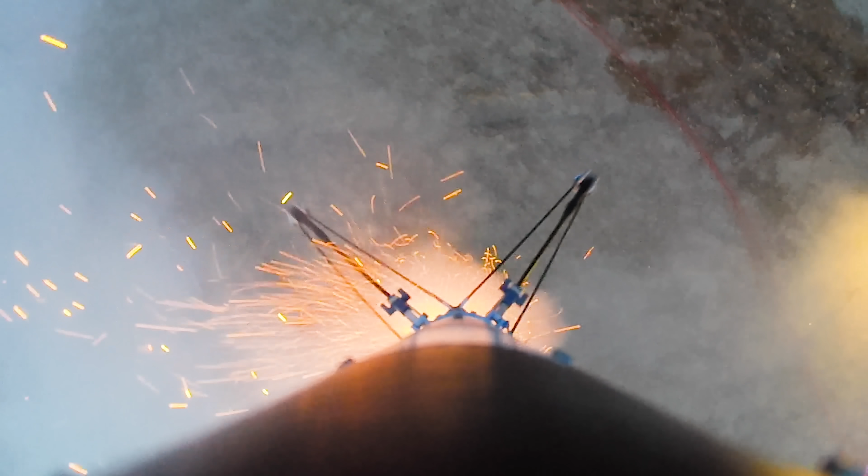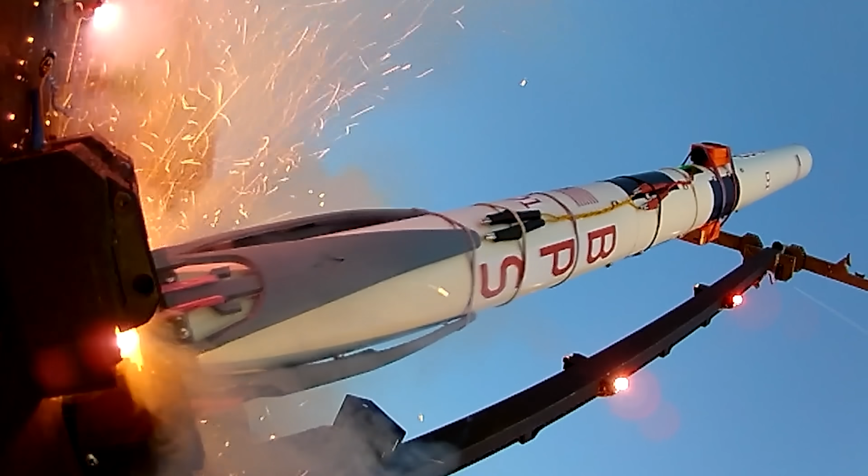There's something I'm a little afraid of. For the last 9 years, I've been building rockets, and most of them don't fly like your typical model rocket. That's not the secret—I made a whole YouTube channel out of it. The thing I'm afraid of is a type of control, a technique used to keep a rocket stable. A lot of the rockets I fly don't use fins.

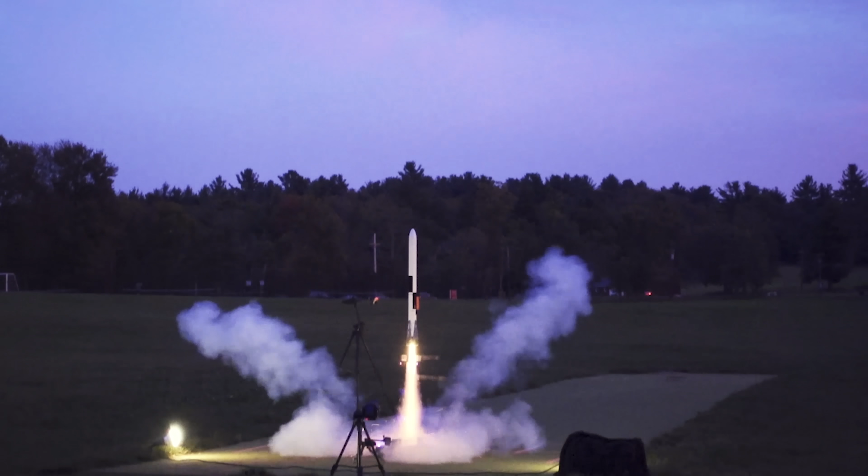They keep themselves on course using little servos to steer the rocket motor at the bottom. You can think of this like balancing a stick on your finger. When you tilt the rocket motor to the side, there's a little trigonometry you can use to figure out how powerful that resulting side force will be. That is not what I'm afraid of—I actually really like trigonometry. Let's just get to the juicy part.

The thing I am afraid of is aerodynamic control, using movable fins to steer the rocket. I'm not afraid of it because I haven't tried it—I'm afraid of it because over the last few years, every time I've tried, it hasn't worked.

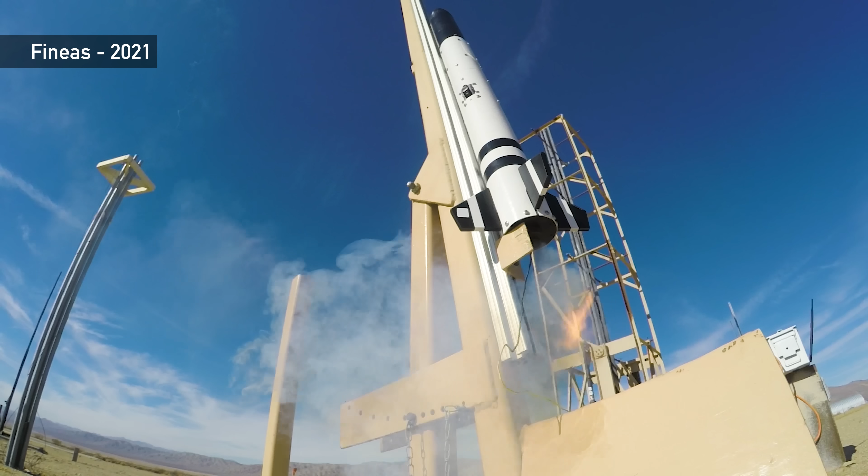The most serious attempt at aero control was on the project I did with Mark Rober to drop an egg on a guided re-entry vehicle from 100,000 feet. But we couldn't get beyond subscale drop tests. The vehicle would almost instantly lose control.

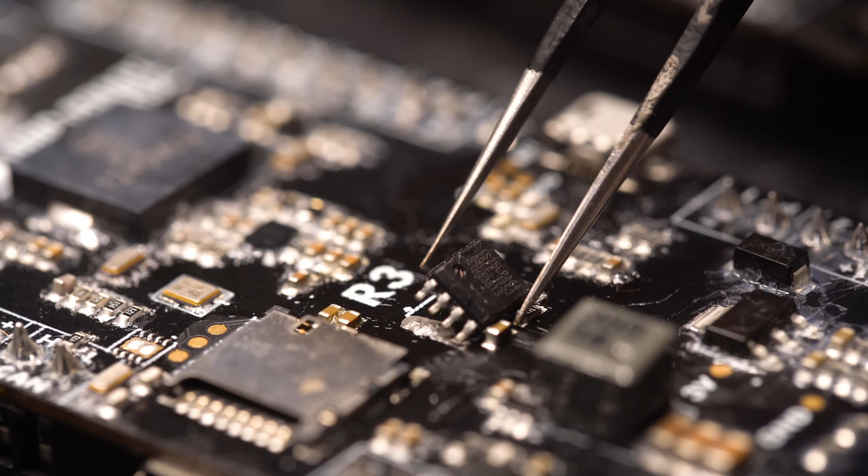So what makes this hard? Why can't you just tilt the fins in the right direction and steer it where you want to go? The answer involves a lot of math, and the good news is we're not doing any of that math today—that's the topic for the next video. Today is all the cool stuff. In this video, I'm going to show you the first time I have ever gotten supersonic aerodynamic control to work.

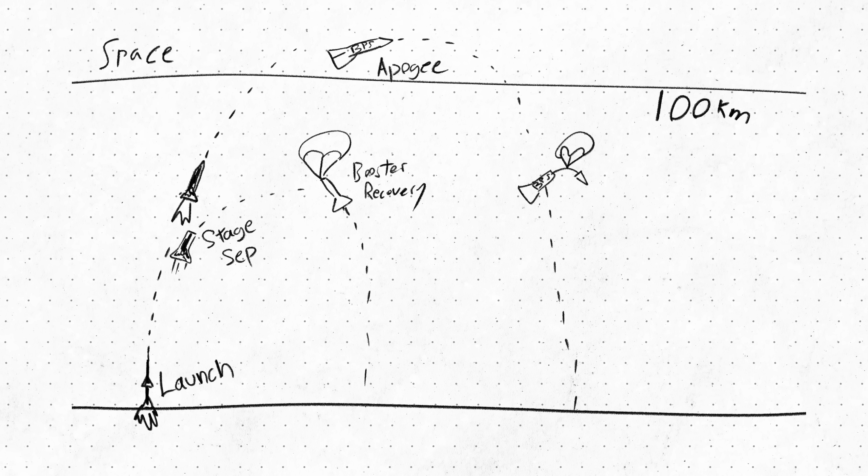Before we begin, I want to answer why I want aerodynamic control. I'm on a long journey toward building a space shot, a rocket that goes over 100 kilometers. The burn time on the rocket motors will be relatively short, which means if we use thrust vector control, we'll have large portions of uncontrollable flight.

So instead of thrust vector control, we'll use traditional, flat, non-moving fins to keep the rocket on course. This is called passive stability. You point the rocket where you want it to go, launch with little or no wind, and as long as it gets up to speed quickly, the rocket will fly relatively straight.

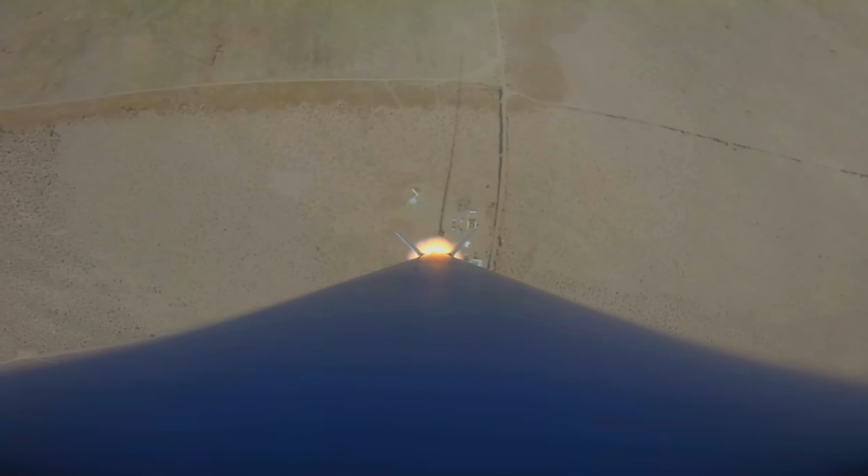One project goal for the space shot is capturing good footage on the way up and while in space. Here's the thing about fins on a rocket: misalign them a little, you spin. Any asymmetries on the body, you spin. Launch on a day that ends in Y, you spin. For this reason, I designed a camera spinner to counteract that rotation.

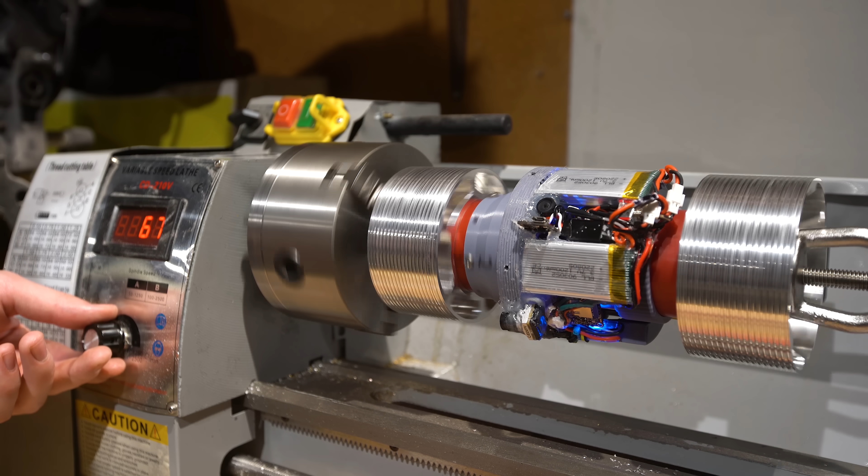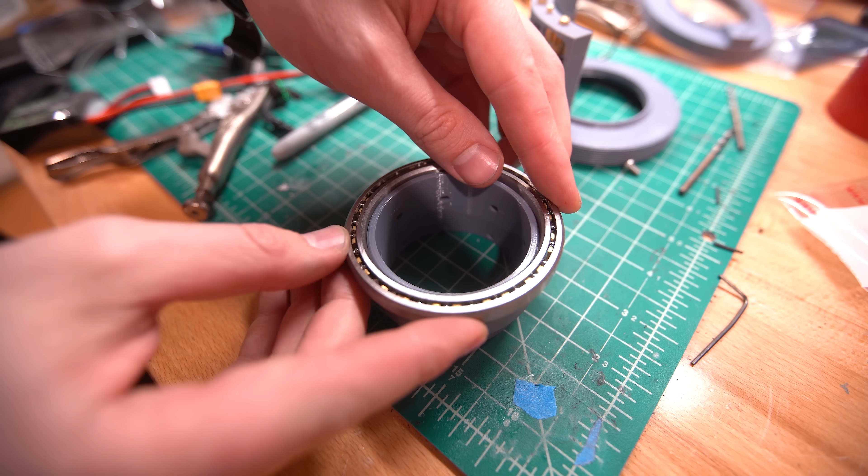The idea was to mount all onboard cameras on a large bearing, then spin them at the exact speed and in the opposite direction of the rocket. So while the rocket spins, your footage comes out stable. If we have this on the space shot, it can spin as much as it wants and we'll still get good footage.

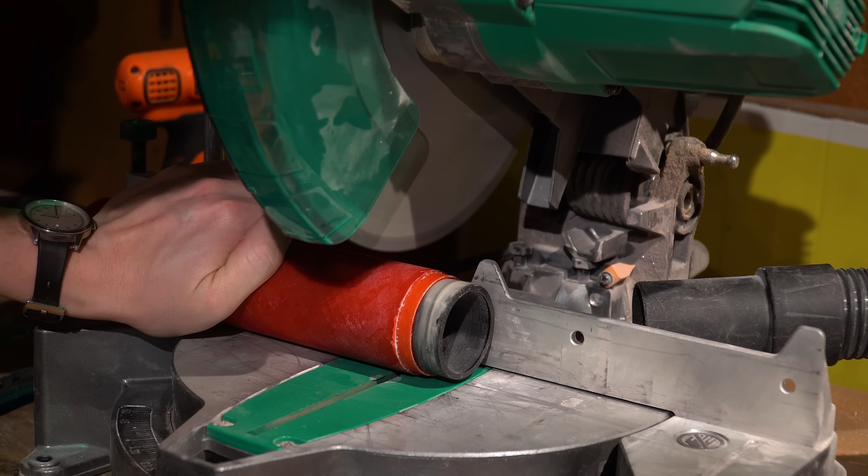There are two problems with this approach. Number one, it was stupidly heavy—you've got to transfer all those bending loads through a smaller center tube, and the attachment points on either side need to be very well aligned. Honestly, it was kind of a nightmare to build. Two, it's overcomplicated. At some point, why don't we just not let the rocket spin?

That is where aerodynamic control comes in. We want to control the roll axis. I want footage that looks like this, but smoother and without the spinning fins. I don't just want to control roll though.

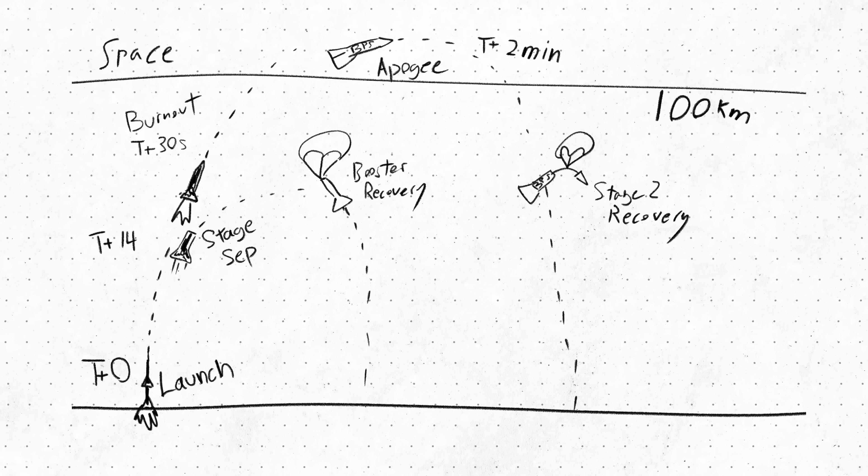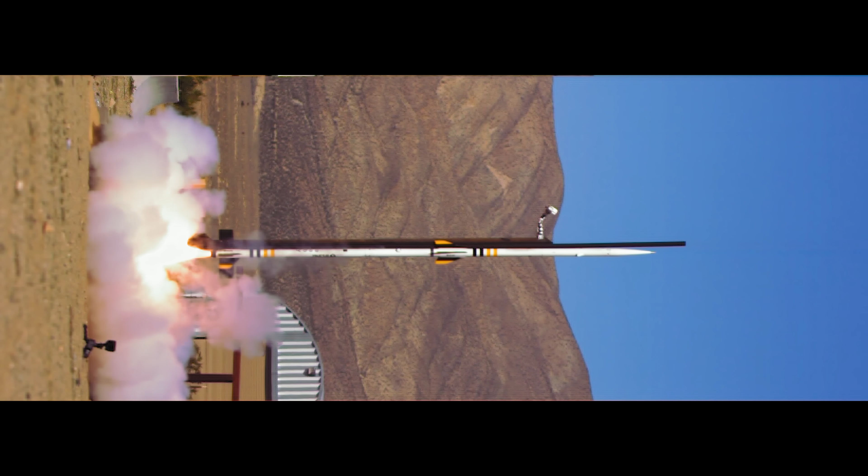The space shot architecture I've got right now is 2 stages, not 1. 2-stage high-altitude vehicles are notoriously bad for recovery dispersion. With no guidance, a 2-stage space shot rocket can easily land 10, 20, 30 miles away, which constrains where we can launch this thing pretty hard. Part of that dispersion is wind on the way down, but a lot of it is the second stage pitching over on the way up.

No matter how hard you try to point the vehicle upright, there are many contributing factors that will cause it to tip over slightly as it ascends. So what if we just keep nudging it back to upright with tiny control surfaces? In my mind, we've got two options—actually, there's a secret third option.

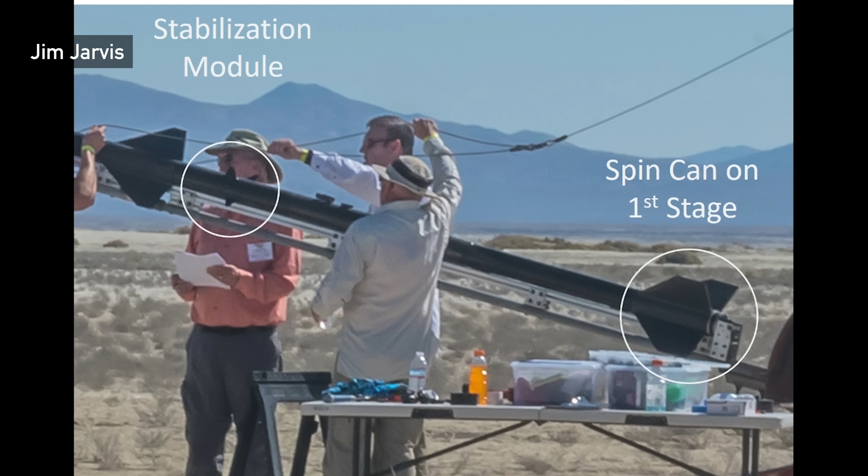Option one: we add canards on the front of the vehicle—little tiny movable fins. With 4 canards, we can move the rocket around in roll, pitch, and yaw. These are seen all over the place on missiles and rockets. Even in amateur rocketry, folks like Jim Jarvis have perfected systems like this. One thing you'll notice with Jim's flights is that the fins at the bottom of the rocket are spinning. Why is that?

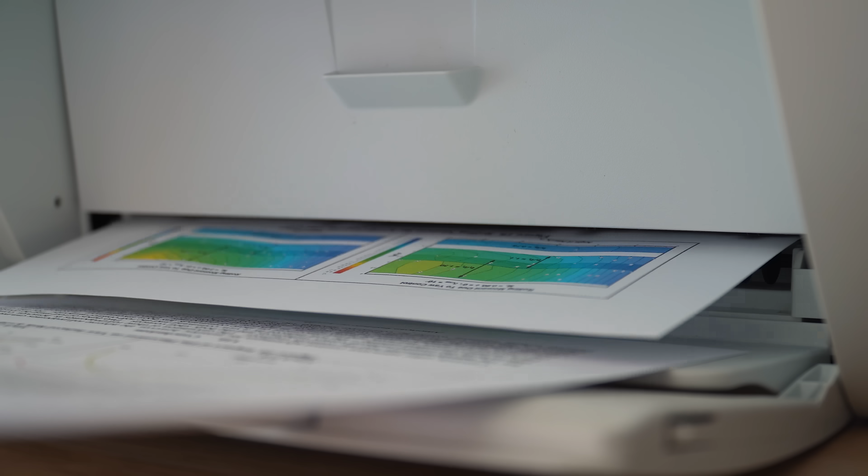The effect of tail fin parameters on the induced roll of a canard-controlled missile. No offense, not a very catchy title. Maybe toss a Mr. Beast face and call it '10 sexy tips to keep it going steady: how to prevent your missile from rolling.' Anyway, check this out.

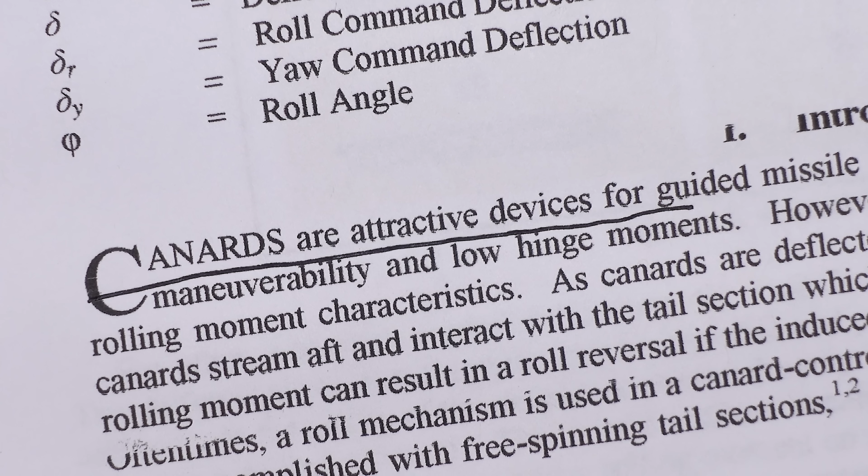Canards are attractive devices. I'm telling you, change the title. This is already clickbait.

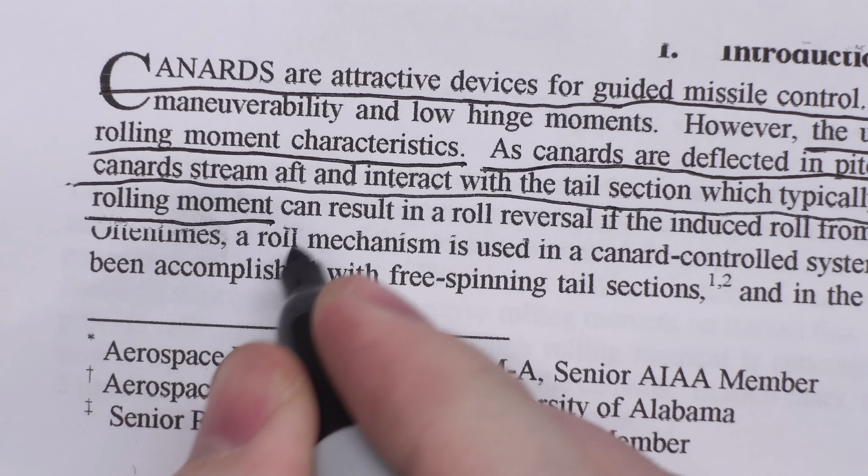The use of canards as control devices complicates the rolling moment characteristics. As canards are deflected in pitch, roll, and/or yaw, vortices emanating from the canards stream aft and interact with the tail section, which typically induces an adverse rolling moment. This adverse rolling moment can result in a roll reversal if the induced roll from the tail fins exceeds the direct canard roll control—i.e., the downstream effects from the canards can be more powerful than the canards themselves.

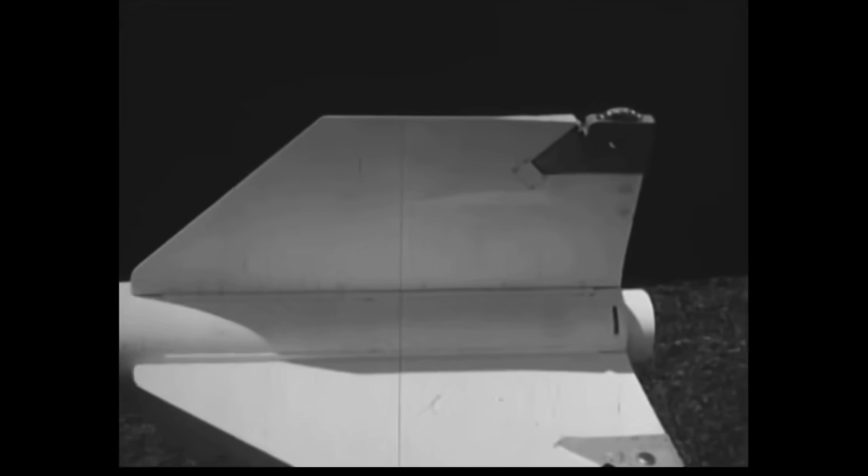Oftentimes, a roll mechanism is used in a canard control system to mitigate the adverse roll properties. This has been accomplished with free spinning tail sections, or in the case of the Sidewinder missile, with rollerons.

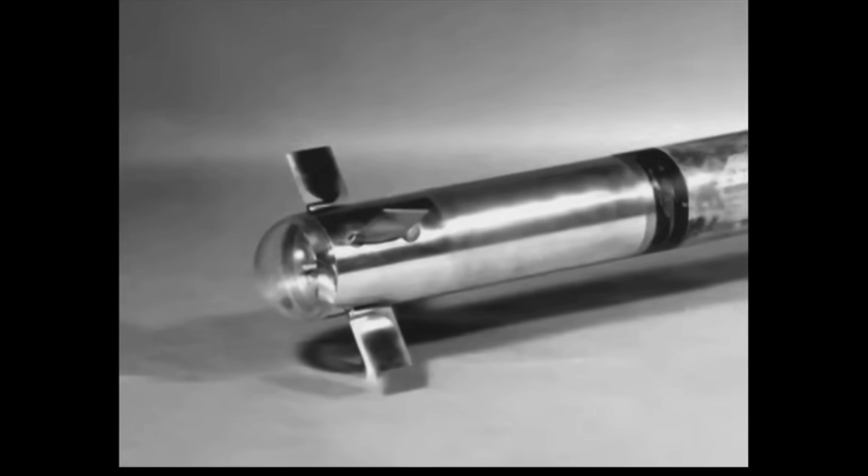The TLDR is that when you tilt a canard forward of the set of static fins, the vortices that shed off that canard fall back toward the aft fins and can sometimes, not always, generate enough of a low pressure zone to induce the exact opposite control input. It is an inherently chaotic and turbulent phenomenon, and for that reason, it is extremely hard to simulate.

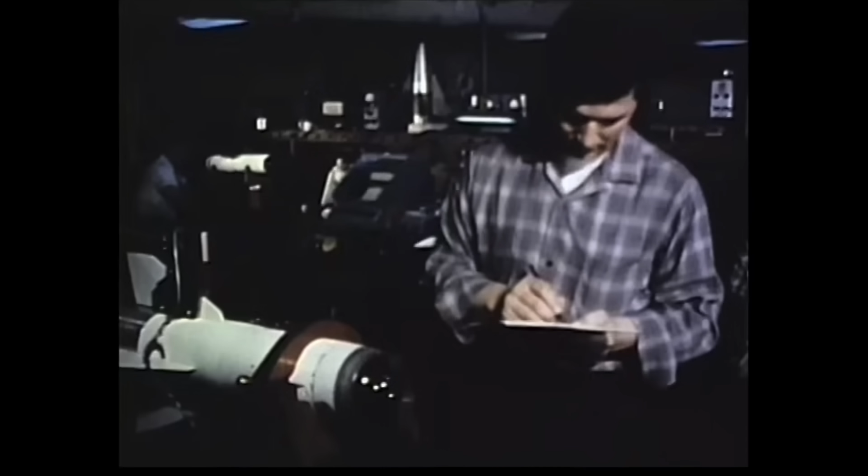Rollerons, by the way, are a very cool solution to this problem. In the 1950s, when the Sidewinder missile was being developed, the rollerons were added in part because we had no way to model the complex vortex shedding that comes off of the canard tips.

And now, we do have that capability. Defense contractors do have that capability, which is why newer versions of the Sidewinder do not feature rollerons, and basically all modern missiles don't have them either.

I do think it would be a fun project to fly some rollerons in the future, but I'm not interested in using them for the space shot. I'd like to actively control yaw, pitch, and roll, and we should search for a solution that does all three axes at once. With vortex shedding making canards, as the paper might put it, the less attractive option, another solution would be to rotate the aft fins themselves.

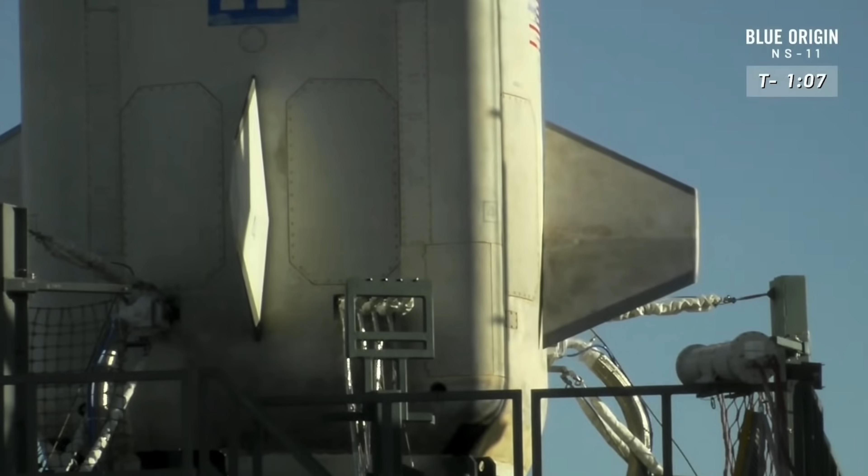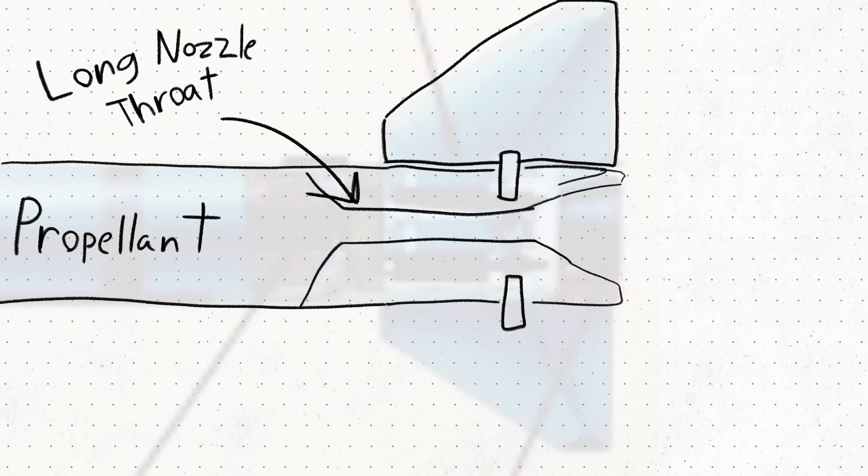This is another common approach with modern missiles and sounding rockets. Typically, engineers will design the fins such that they attach right near the throat of the rocket motor's nozzle. If you're careful about thermal management from the rocket motor, and efficient in your nozzle design, you can jam actuators inside this free volume and steer the rocket in yaw, pitch, and roll with one set of fins.

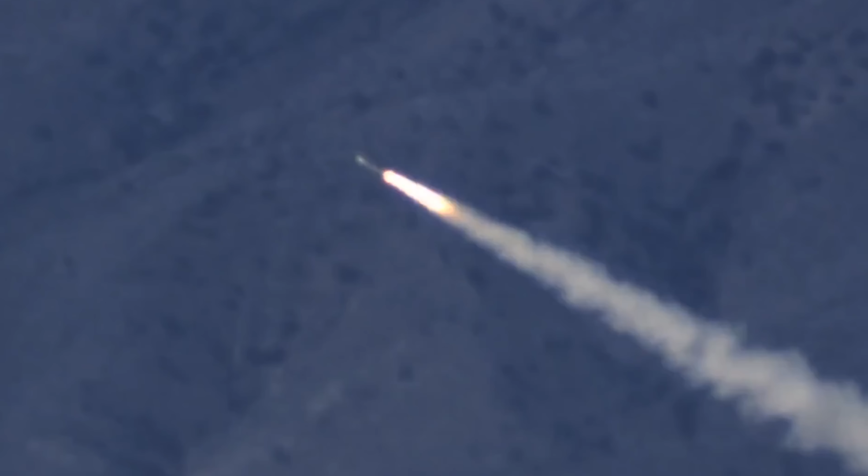This, of course, like anything, has pros and cons. Pro: you have lots of control authority. Once you're up at Mach 2, tilting the fin even 1/10 of a degree will generate enormous side forces. If you wanted to make a 90-degree turn, you could do so in a hurry, and that's why this approach is seen on a lot of missiles that need to swoop around pulling high G turns.

As for the cons, let me put it this way: I know I joke about being built different, but even in these jokes, I don't think I'm built different enough at both solid motor and actuator design to get this approach to work. And the thing is, it's overpowered for what we need anyway.

I'm looking to take a rocket that is 2 degrees off of vertical and make it 0. We need tiny, gentle corrections, not some hard-turning anti-aircraft machine. I just want to go up.

Let's recap. I want a set of control surfaces to very gently nudge the rocket back to upright if it tilts over on ascent. We're actively looking for a low control authority solution, and this rules out the rotating aft fins. Canards are the next obvious choice, but they suffer from the control reversal phenomenon that I do not have the analytical tools to design around.

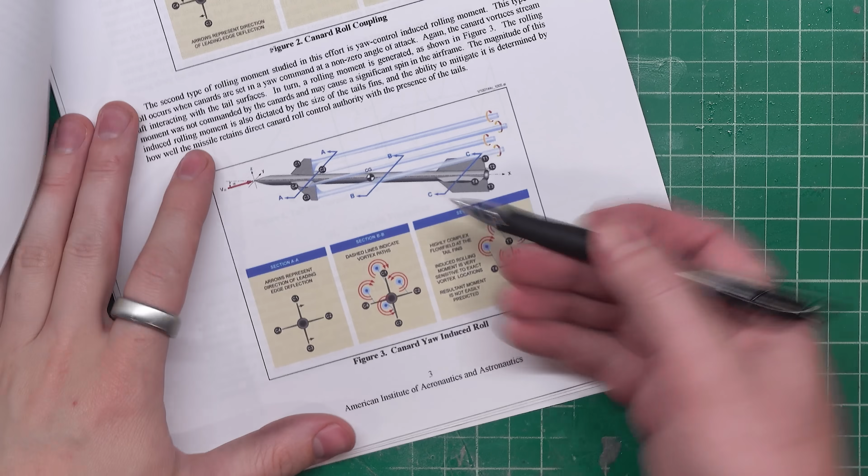And while the spin can fix the roll axis, I have concerns about how well it will work in pitch and yaw control. To be honest, there's always going to be 20 plus ways to solve a problem like this. Genuinely, if you were approaching this problem, I'm curious how you would solve it.

Do you think it's easier to make the fin spin? Would you design your own precision actuator to rotate the aft fins? Would you ditch the two-stage approach entirely and go for one enormous single-stage rocket to make the dispersion problem easier? All of these videos are just me trying, bit by bit, to figure out how to build this space shot.

And while the spin can with canards seems like a viable solution, I have another interesting idea that I would like to try.

What if we had all the benefits of canards with none of the vortex shedding issues? The way this works: embed the canard in the fin.

If we keep the static fins the same size, we can cut out a portion of the trailing edges, embed a servo inside the fin, and use that to gently nudge the rocket where we want it to go.

This approach also means we can tailor the size of the tab to meet the exact control authority we need, while sizing the overall fins to meet the passive stability needs of the rocket. TLDR, we only need small control authority, so we only need small control surfaces.

All of this is just theory though, and as we all know, theory will only take you so far. Let's build it. Using Onshape, let's take a look at the plan here.

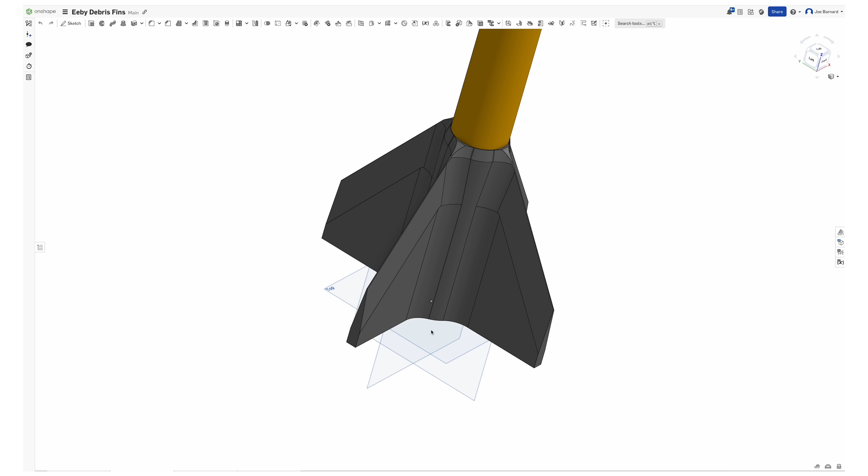We'll start with a 3D printed fin can around a 2-inch diameter fiberglass airframe. The fin can will be printed as one part, and in order to house the servo, the fins will need to be 1/2 inch thick.

The servo we're using here is a Bluebird BMS A10H, the same one I've used for my thrust vector controlled rockets. I also designed a mount to hold the Ava flight computer, and then I got to work building.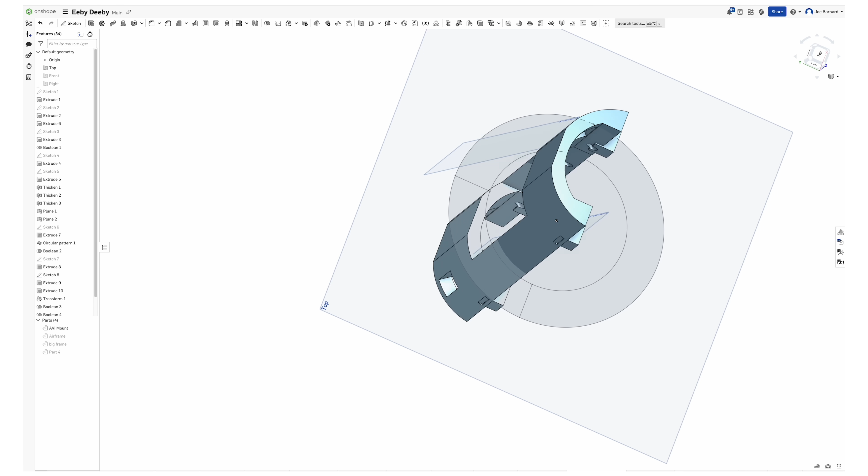Starting with the small prototype, we're only going to try and control the roll axis. Rockets roll all the time, and if something goes wrong and this doesn't work, the worst thing that happens is it spins a bunch. To secure the servo in place, I potted it in epoxy.

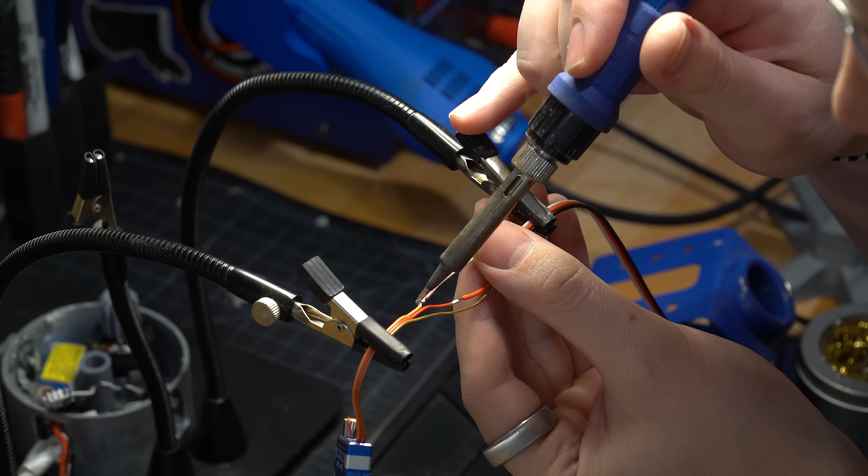The rocket is going to go a little bit above Mach 1, and I want as much strength as I can get in the fins, especially in the hollow section with the servo.

We'll connect the servo to a very tiny control tab on a single fin. Not 2 fins, not 4 fins, just 1.

This is because the energy it takes to rotate the roll axis is literally hundreds of times less than the energy it takes to rotate the pitch or yaw axis of the rocket.

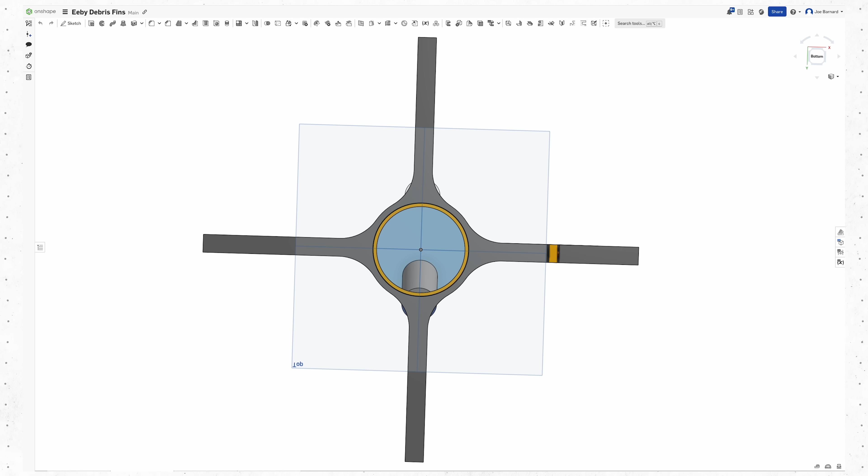If you calculate the MOI, or moment of inertia, for the 3 axes of a rocket, you'll find that because of how different these values are, we can use asymmetric control on the roll axis and have functionally zero effects on pitch or yaw.

I took 2 RunCams and mounted them on board so we'd get some nice onboard footage, one camera pointing down and one pointing out, and as always, they're mounted with about 30 pounds of hot glue.

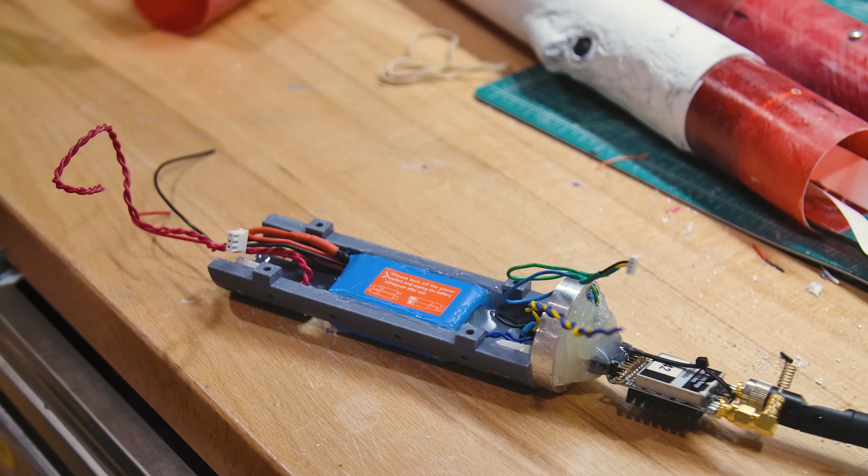The flight computer is Ava, and it controls the fin tab through a servo cable that runs down the rocket. Actually, to be honest, it was multiple cables.

I had a bunch of extra PWM extension cables from other projects, and since this is kind of low stakes, it should be fine to just combine a bunch of cables together instead of splicing into one longer cable.

All right, we're 13 minutes into the video, and I promised you supersonic aero control, so it's time for me to make good on that promise.

I wrote a bunch of code to control how the little tab moves, and then brought the rocket out to the Friends of Amateur Rocketry test site to give it a try.

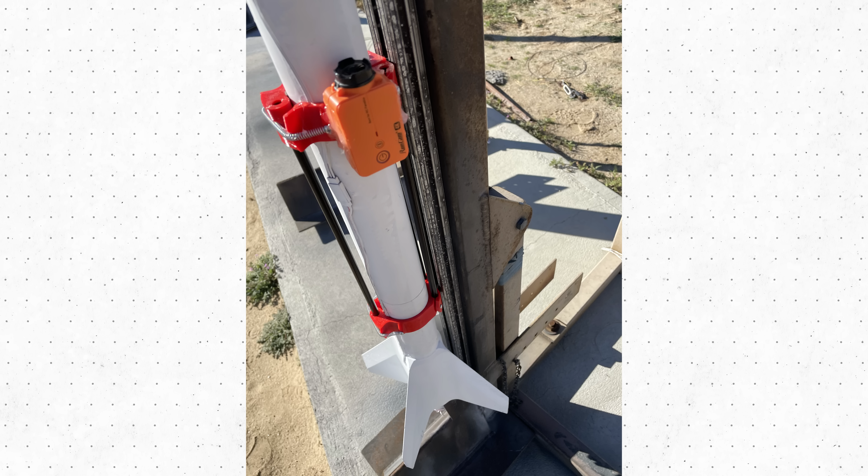For this flight, I also prepared a set of flyaway rail guides, which clamp around the rocket on the pad, then release when it launches, which ultimately reduces drag in flight.

On this set of rail guides, I glued 2 RunCams looking up to watch the rocket as it lifts off. 4, 3, 2, 1, 0.

2, 1, 0. The first flight looked awesome.

Until I looked at the footage.

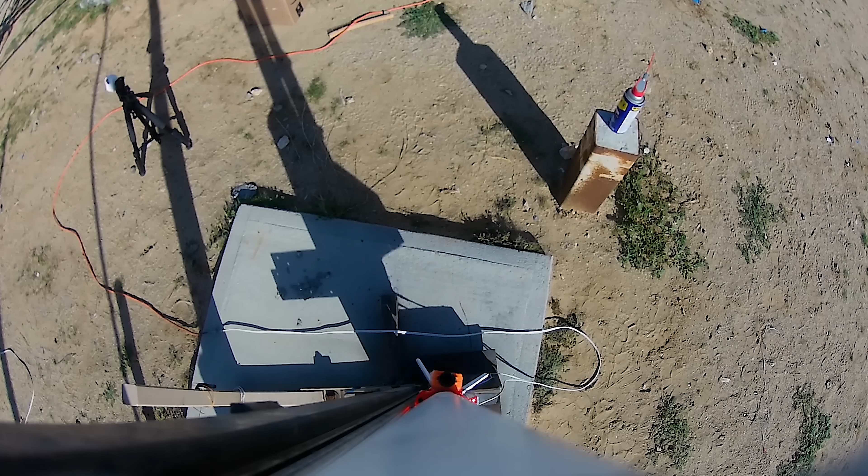There is no roll control here, and this was a huge disappointment.

We're going to talk more about this in the next video, but I ran hundreds of hours of computational fluid dynamics simulations to evaluate how this flight would perform.

The folks on the Patreon can back me up, like, all of my updates this winter were about CFD.

I had a period of 2 full months where the only thing I did was spend my time dialing in these simulations to get this right.

And to remind you of the stakes, if I can't figure this out at the small scale, I certainly can't figure it out for the space shot.

Even the shots that I got from the flyaway rail guides weren't good. One camera failed to record completely, and the other one was kind of out of focus.

I guess it's not that terrible since it's recording in slow motion, but wait, hold on, let's just go back. What is that? What is that?

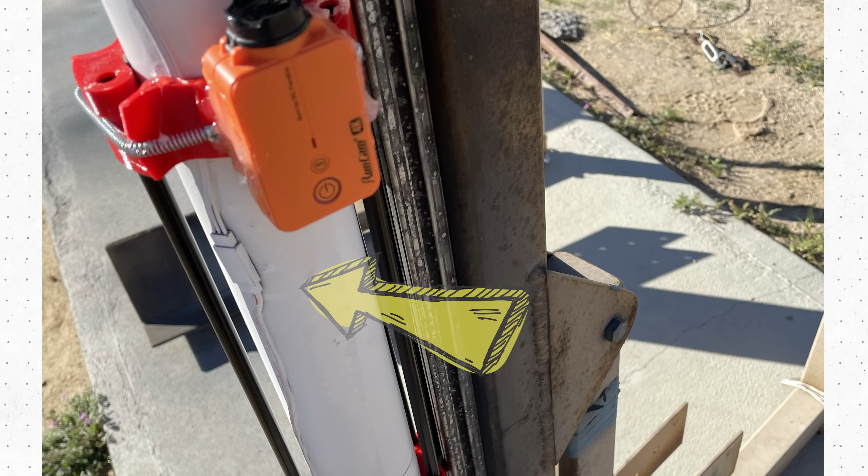I don't know if you've already put the pieces together, but your boy, Joseph Barnard, in his infinite wisdom, clamped the flyaway rail guides just forward of an exposed servo connector such that when it launched, the guides disconnected the servo. So I have no valid roll control data from the test. I guess that's it for this video. Thank you guys so much for watching.

You can't end it like that. What? You promised supersonic aero control.

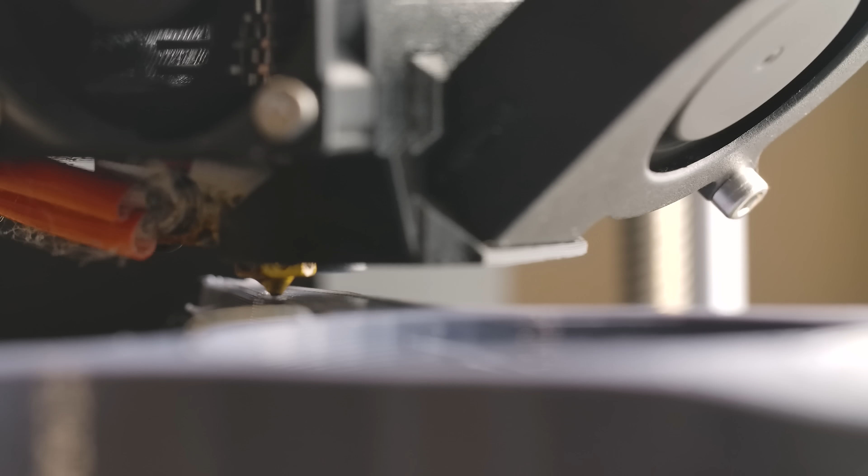On Flight 2, I rebuilt the fin can since it's easy enough to print and I wanted another shot at this rocket from the ground up. I spliced the servo cables so that all connections were soldered without the possibility of detachment, and used longer cables to keep those to a minimum.

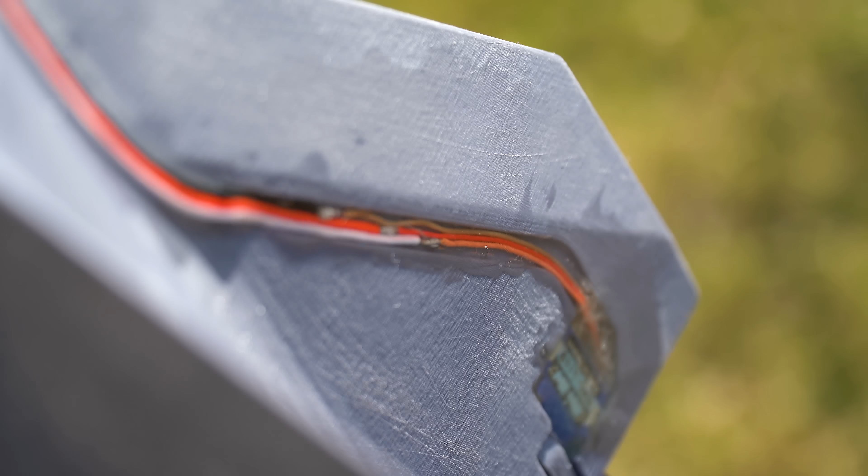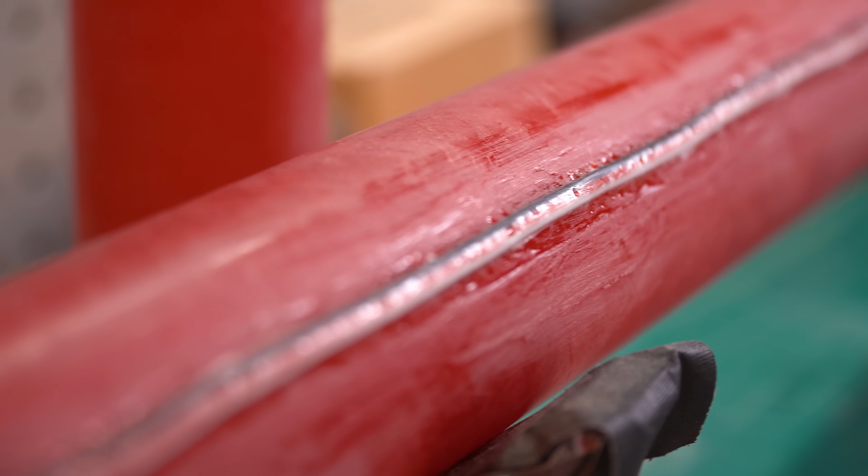I also switched from flyaway rail guides to 3D printed rail guides. I potted the long servo cable in CA glue, which did a good job of sealing and protecting it against getting damaged or ripping off. CA, as opposed to epoxy, also left the surface of the fin much cleaner this time, especially after painting over it. I also switched over to fancier onboard cameras for this flight.

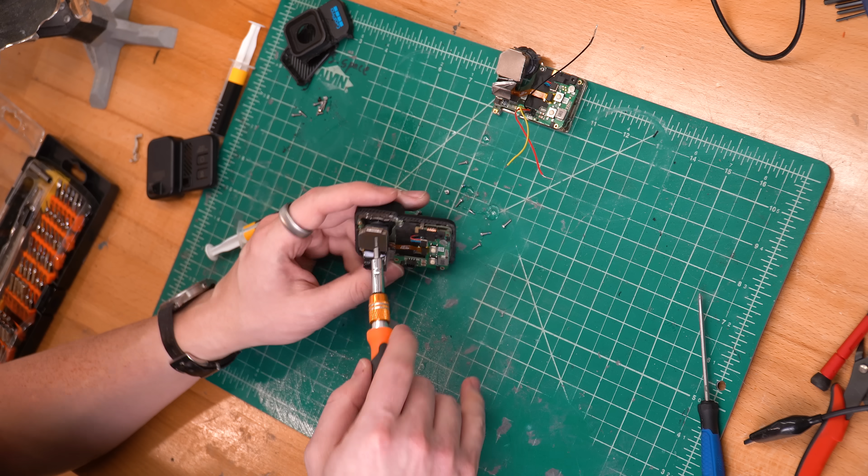I'm doing a future video on onboard cameras, but the new cameras are GoPro Hero 10s that I tear apart and deconstruct. They shoot at 4K, 120 frames per second, they are beautiful, very difficult to work with, and they barely fit inside of a 2-inch airframe. They're mounted on here using a copious amount of epoxy loaded with Kevlar pulp.

I see this, I see the way it looks. I am not proud of everything I do.

Thankfully, we don't have time to talk about how gross this looks because it's time to head back to FAR to launch this thing again. 1, 0.

Great, up. Another gorgeous ascent here visually speaking, but I also knew right away that the roll control had done something right by looking at the telemetry. Okay, 2 kilometers. 2.2, 2.3, 2.4.

Although it's low update rate, we can compare the roll set point to the roll attitude in degrees. The numbers are very close for a good portion of the flight. Oh my god, I think it worked. Dude, it definitely worked. It actually worked way better than I thought it would.

Let's get the hard part out of the way first. There is no onboard footage. The GoPros did not start recording for whatever reason. Actually, that's not totally true. Maybe that's not the way to phrase it. We do kind of have onboard footage. I'll explain in a minute, but first let's look at some flight data.

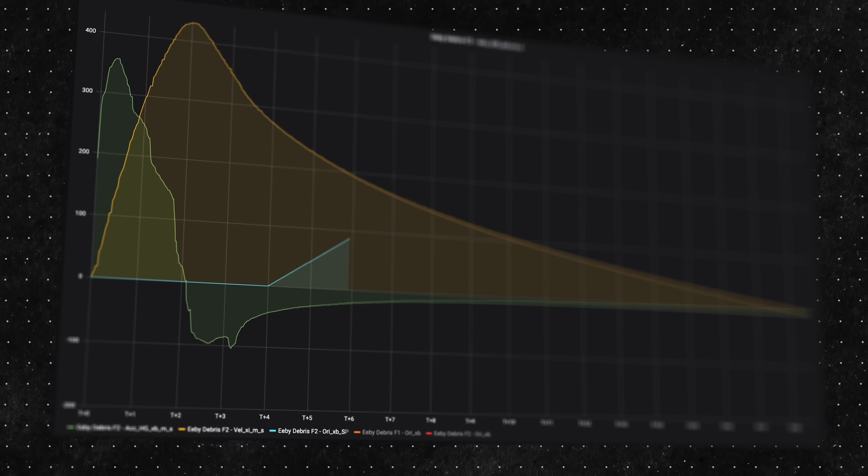Next, we'll plot the roll set point. This is the desired roll angle in degrees on the rocket. Our goal is to roll slowly to 90 degrees and then back, as a little roll program to see how well the system works. Now we'll plot the roll angle in degrees from Flight 1.

This is the exact same rocket, but with no roll control because of that disconnected servo cable. The rocket is spinning constantly, so our roll angle rotates quickly between negative and positive 180 degrees.

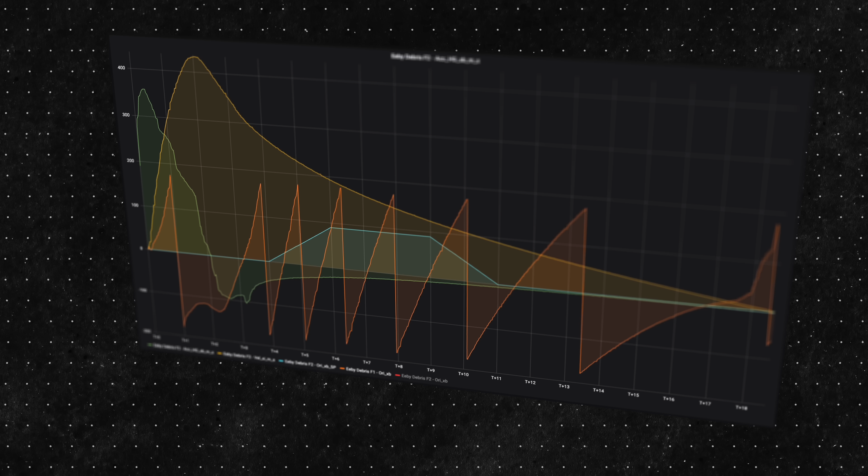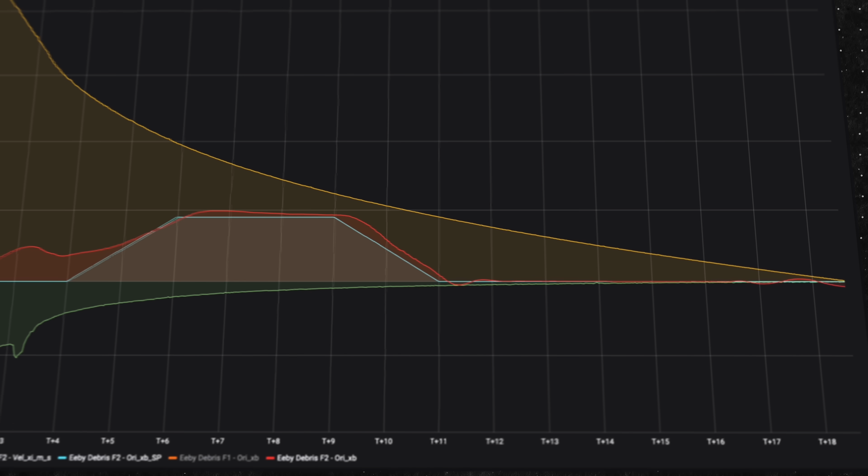Finally, let's remove the Flight 1 data and plot Flight 2. At first we see some disturbances in the roll control, but soon after the system locks in and follows that set point closely. In fact, near the end of the ascent we're so close to 0 degrees that it's difficult to pick out the roll angle from the set point.

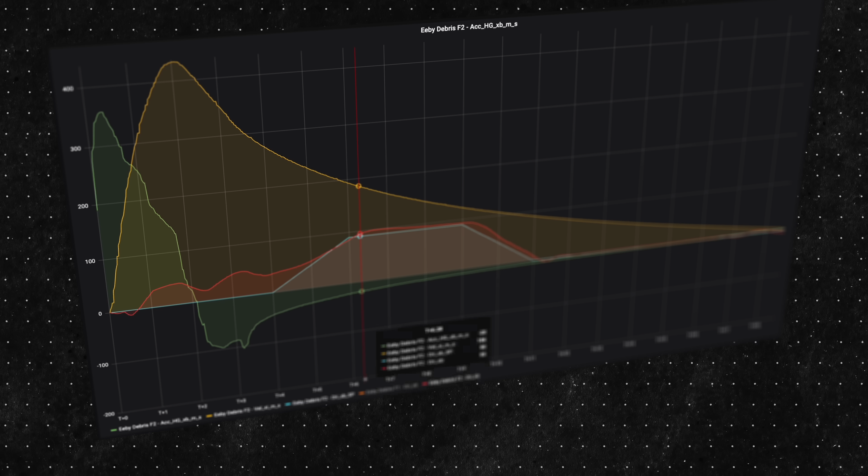As we near apogee, roll begins deviating again while we lose speed and thus lose control authority. Let's focus in on the initial oscillation at launch. Our maximum velocity was 433 meters per second, and this was reached 500 meters AGL, or above ground, but 1100 meters above sea level, putting our max speed at Mach 1.3.

On the plot, I'm also going to mark Mach 1.2 and Mach 0.8. The area between these two is the transonic region. This area of flight is particularly hard to manage, and if you'd like a video about why that is, definitely let me know. I would like to do one.

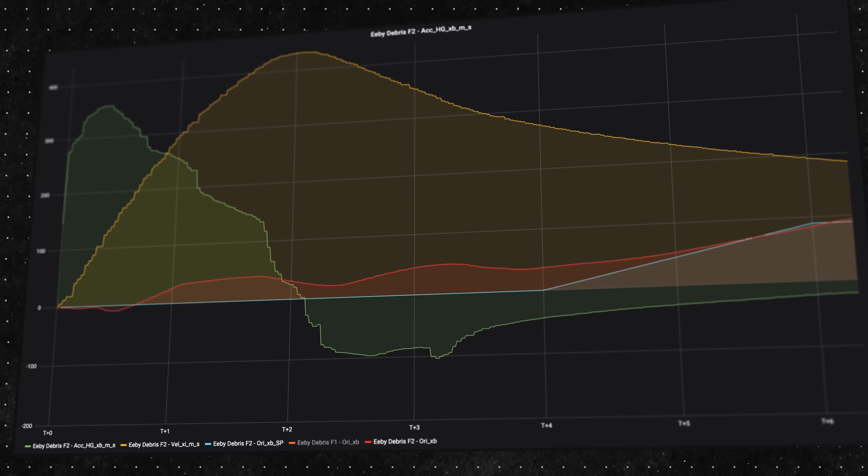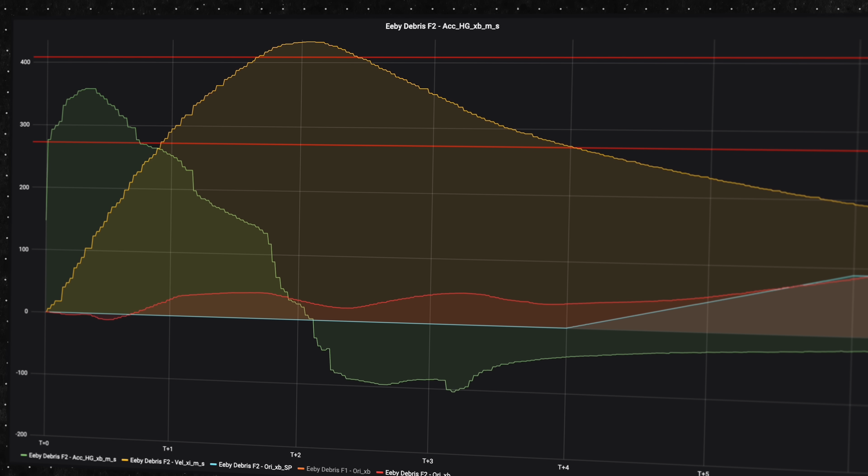For now, what I want to point out is that our greatest disturbances happen in this region, both while we're speeding up and while we're slowing down. In fact, the disturbance almost seems to start correcting itself once we pass through Mach 1.2 and most flow around the rocket is supersonic. I'm reading the tea leaves pretty hard here.

Or put another way, I'm drawing a lot of conclusions from what amounts to about 3 seconds of flight data. We're going to get more flight data in the next video, so make sure you're subscribed for that, but for now, we do kind of have some onboard footage. I sent flight data out to a few folks who volunteered their time to use that data to create animations of the flight.

Since Ava tracks 3-axis orientation, velocity, GPS, altitude, etc., that data could be used along with a CAD model and terrain maps to see what the GoPros should have seen. I want to give a huge thanks to Dan, Andrew, Matt, and Gabriel for working on this and allowing the flight to be seen so much more clearly.

With a perspective like this, it's much easier to visualize how stable the flight was in the roll axis. Even the disturbances after launch don't roll us past 1/8 of a rotation.

Gabriel got a really fantastic perspective here with the body axes labeled and terrain in the background. This was done using ANSYS AGI Systems Toolkit, which is specifically built for aerospace mission engineering and analysis.

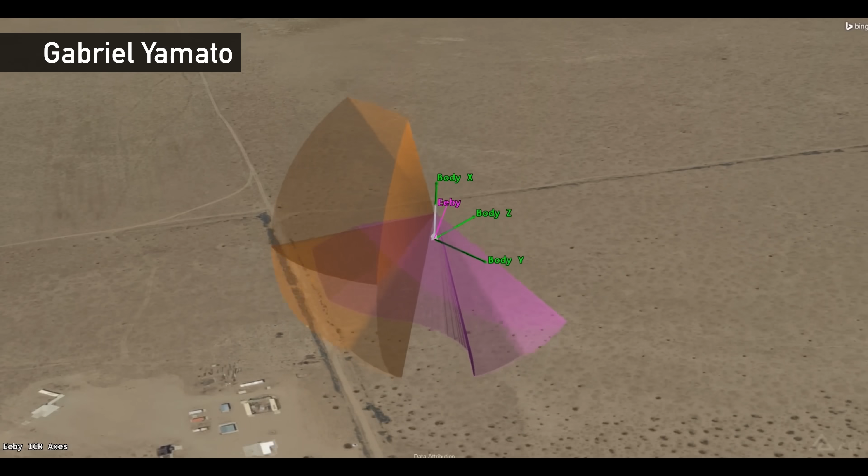He also modeled the field of view that both cameras would have had on the way up had they actually been recording. Finally, my buddy Dan worked in Unity to create a whole suite of options for visualizing the data from multiple angles with the real data streaming in the top right.

We can also get a sweet perspective of the trim tab doing its thing during flight. One thing to note is how little the tab actually moves. This is again because of how sensitive that roll axis is. It takes almost no force to push it around.

On the roll program transitions, we get some really wild oscillations, which were caused by a programming bug on my end, but things were clearly still smooth enough for a solid flight. This is huge. This is much smoother flight data than I anticipated, and it gives me confidence that we can keep moving forward toward a full 3-axis controlled space shot and solve some of these dispersion issues.

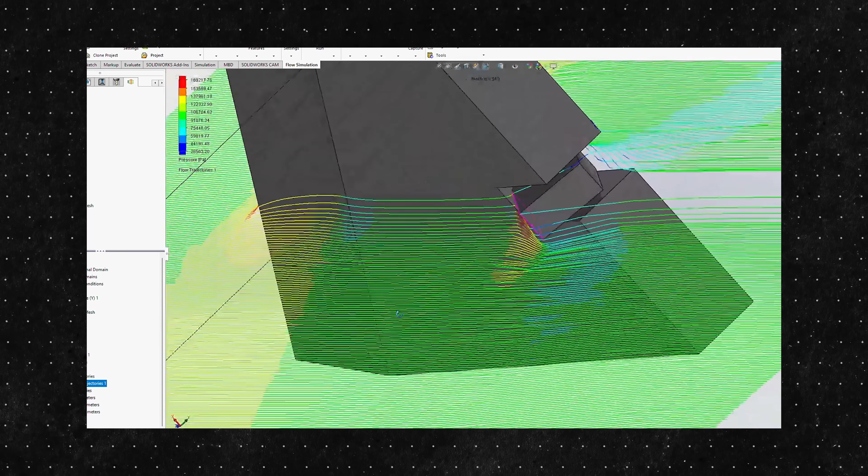I will still need a lot more subscale flights that focus on pitch and yaw, and those of you with a keen eye may have noticed there's a ton of detail missing in this video. Hundreds of hours of CFD, massive spreadsheet lookup tables, fin tab sizing analysis. All that stuff isn't here because it's in the next video where I'll cover why this stuff is so much harder than thrust vector control.